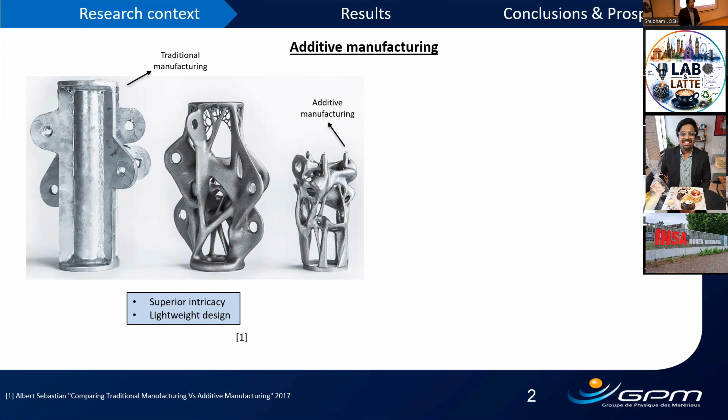Starting the defense, from an engineering perspective, additive manufacturing allows the creation of designs that are theoretically impossible with traditional manufacturing. This gives companies a competitive advantage so they can create products that are better, more efficient, but also appealing and unique to their customers.

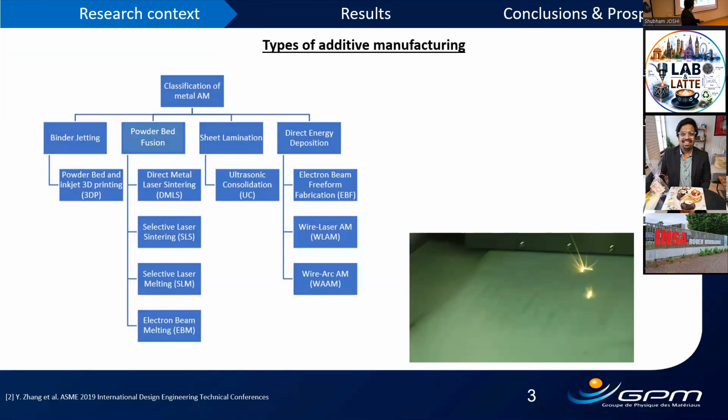There are several processes under the tree of additive manufacturing, depending on the material to be fabricated, type of feedstock, source of energy, and so on. But for metals, selective laser melting or laser powder bed fusion has been extensively used in research and industry owing to several advantages—I won't go into them since I only have 45 minutes.

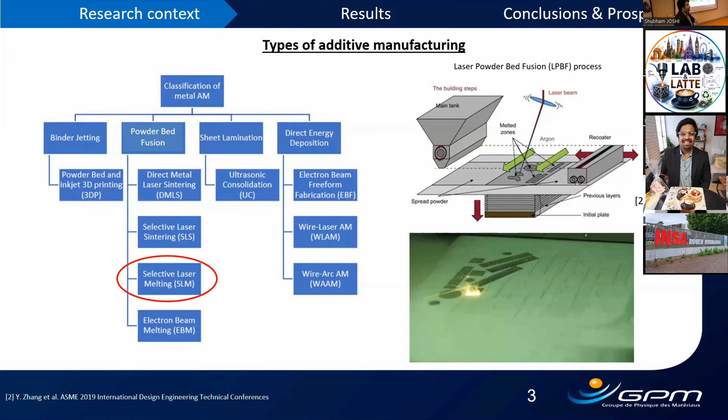In general, you can see the schematic diagram of laser powder bed fusion. A recoater spreads the powder on the bed, and as you might have seen in the video, the laser interacts with the powder, melting it depending on the CAD model, and the process is repeated until the final product is formed.

As the world moves away from traditional manufacturing towards additive manufacturing, several manufacturers and companies are deploying their footprint in this field, with many different applications in the past few decades. Looking at the market size prediction for the next 7 years, in 2030 the market size is predicted to be more than $11 billion. So it's a huge leap for any industry to make.

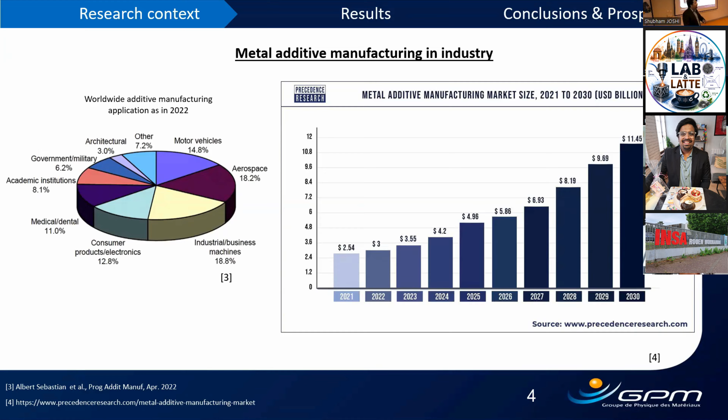Looking at current values, to make this leap comfortable, the most important thing industry needs to understand is how to achieve the mechanical properties desired by their customers. To get there, it's very important to talk about the mechanical properties that we have.

This review shows a yield strength versus elongation map for several alloy systems fabricated with additive or traditional manufacturing. As an example, if we look at this yellow domain, it is additive manufacturing steels, and what we see here is a varied range of mechanical properties that could be achieved for steels processed with additive manufacturing.

So certainly there needs to exist a relationship with processing parameters if you want to reach these mechanical properties. But fortunately or unfortunately, this link is not direct, and there is a huge pillar standing in between: microstructure.

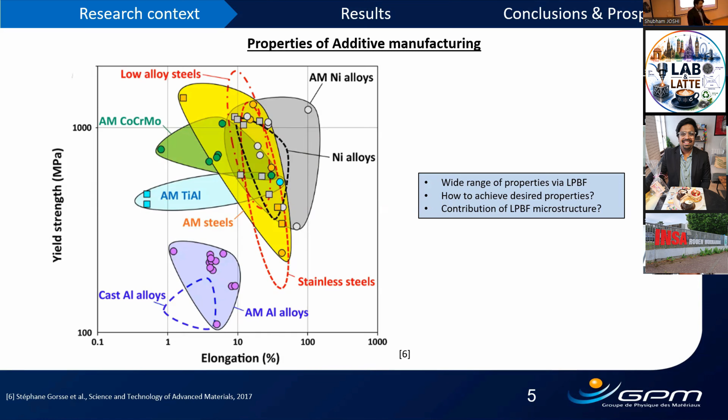Talking about the complexities of microstructure in additive manufacturing, this is one of my favorite images which I came across during the literature review, and I have used it extensively in my manuscript. If we consider LPBF 316L stainless steel as an example, we see that additive manufacturing generates a multi-length-scale microstructure in terms of crystallographic texture or morphological grain structures.

Then down the length scale, we have fusion boundaries and cellular structures due to rapid solidification, which is normally associated with the laser powder bed fusion process.

Down the scale, we see these dendritic cellular structures in detail with dislocations entrapped on the walls. And finally, at the lowest scale in nanometers, we see these second phase particles, precipitates, or oxides.

Having researched this for more than a couple of decades now, researchers are still trying to find the answer: which of these multi-length scale based microstructural features are responsible for mechanical properties? So talking about the highest length scale, which we discussed,

literature review of nickel 20 chromium fabricated with LPBF shows that crystallographic texture and grain morphology could be associated with process parameters. If we change process parameters, we see differences in texture, grain morphology, etc. And if we look at the engineering stress-strain curves of two differently processed alloys, we see there is a difference, so there could be an impact of texture.

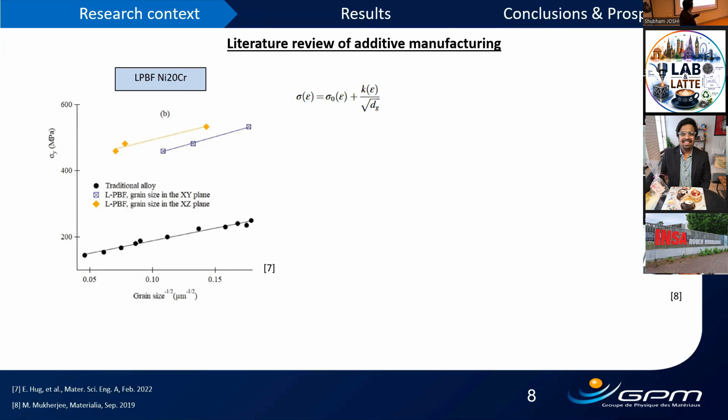But if we consider laser metal deposition of 316L, for the same kind of graph - yield stress versus inverse of square root of effective grain size - we see that the slope changes for differently fabricated samples of the same alloy. So that means there is an influence of grain size.

So can we generalize here that maybe it's associated to process parameters, or is it associated to process or material? Well, the question is still open.

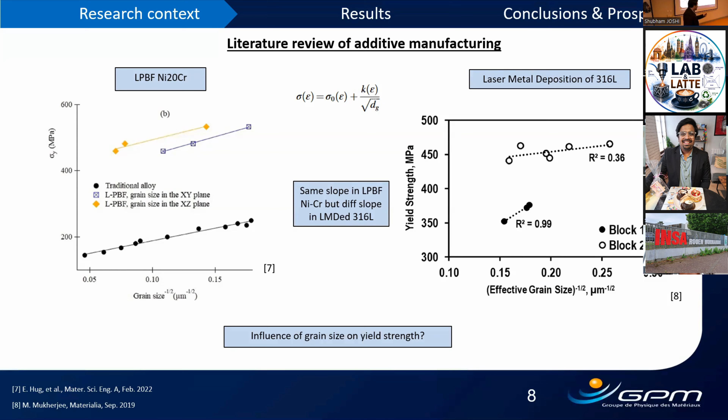We have so many more microstructural parameters we could talk about. Just to summarize, can we say it's an effect of texture, dislocations, precipitates, LPBF building direction, cellular structures, or grain size? Well, it's just the tip of the iceberg, and we have many more problems to come.

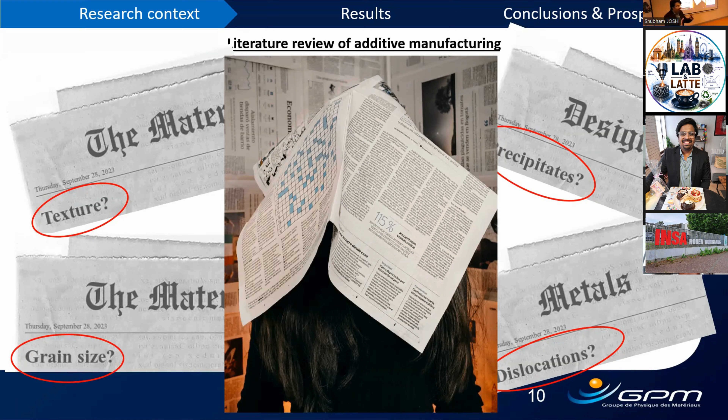So to try to avoid this complexity and difficulties, we decided to employ a simple nickel 20 chromium binary alloy, which has a simplified microstructure.

If you look at the phase diagram, with 20% weight chromium, it is theoretically a monophasic alloy. It forms a predecessor for nickel superalloys, having some applications in the high temperature industry. The advantage is that it's not as complex as a superalloy, because it is monophasic, so it's straightforward.

But another reason for choosing this kind of alloy is it has planar slip, so it has a strong propensity to avoid dislocation annihilation or cross slip.

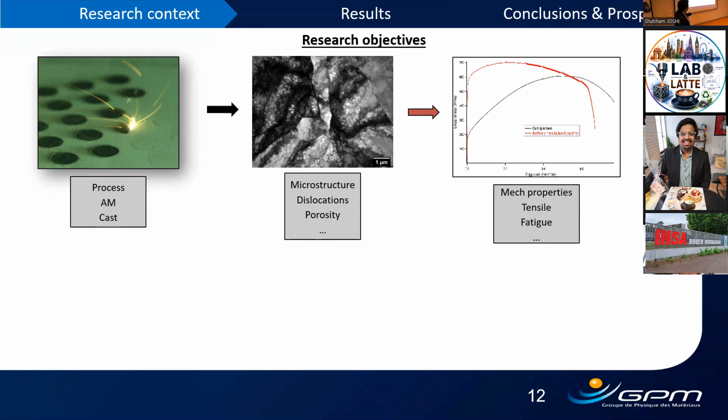Choosing this alloy, we focused our research objectives on the link between microstructure and mechanical properties, and we could formulate 4 important objectives.

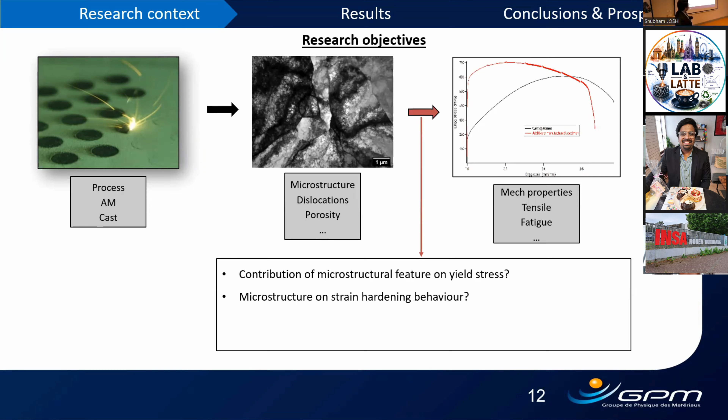The first was: what is the contribution of LPBF microstructure on yield stress? What is the contribution of the same microstructure on strain hardening behavior of LPBF nickel 20 chromium samples? Finally, the influence of LPBF microstructure on cyclic properties, and at the end, higher temperature tensile properties of the LPBF.

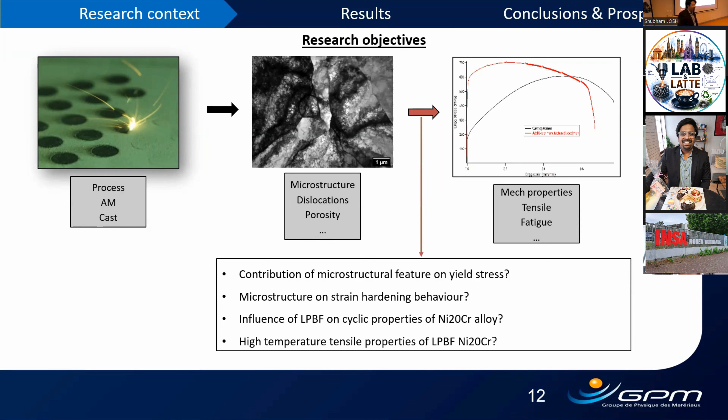But I only have 45 minutes. I wish I could talk about all the objectives, but here I'm just going to talk about the first 2.

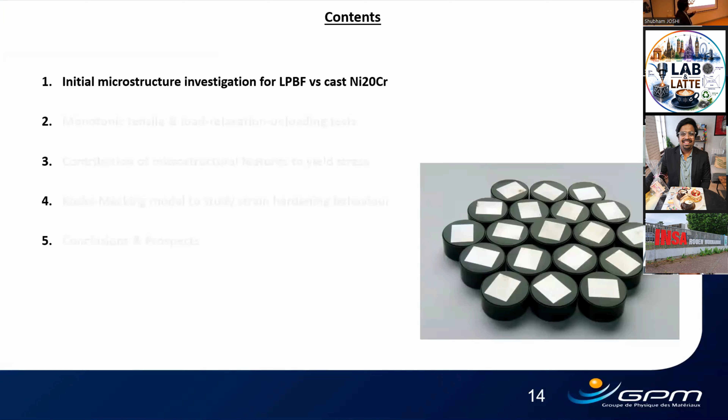These are the contents: we'll start with initial microstructure, mechanical testing, and the first 2 objectives, and finally conclusions. So we will discuss the first chapter: initial microstructural investigation.

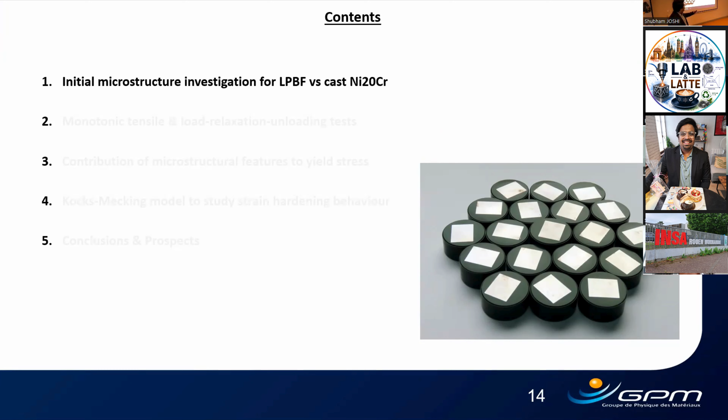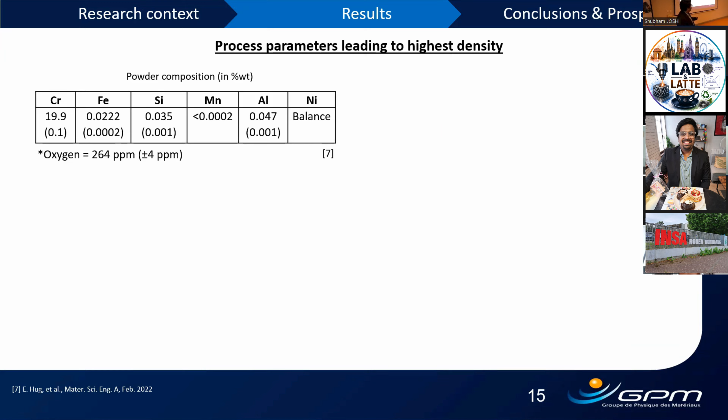The balance is nickel. The parameter optimization for fabrication of LPBF samples was done before the initiation of my PhD, so I was not responsible for it. It was done by Dr. Maxime Lelievre at CRISMAT, and these parameters led to highest density and least relative porosity.

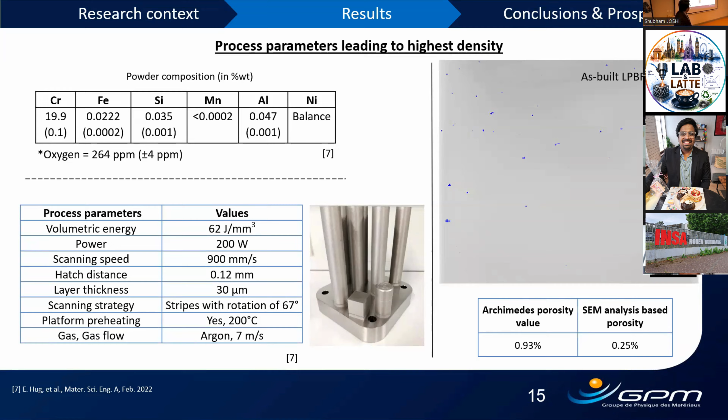Looking at the initial microstructure of LPBF nickel 20 chromium, this imaging has been done in SEM ECCI, with the building direction upwards, and we see a typically formed fine and heterogeneous grain structure.

If we look at the grain orientation map, we see the melting pools in this orientation, with the building direction going upwards, and the maximum intensity to be 2.6, which means this parameter set does not induce a lot of crystallographic texture, but we can clearly see some morphological texture.

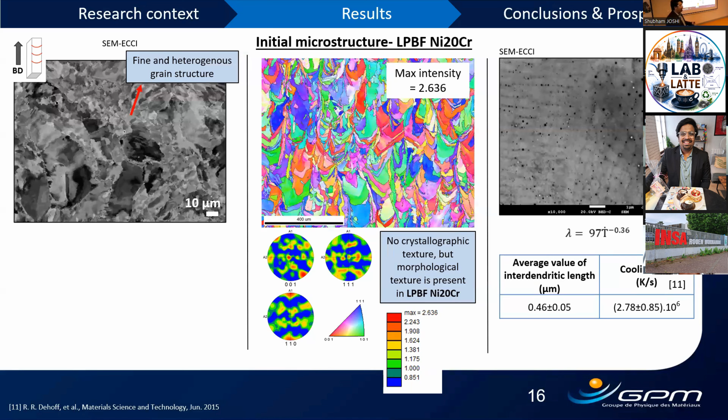Talking about another aspect of microstructure, when we magnify, we see different colonies of dendrites or dendritic cellular structures—several names are used in the presentation, but they refer to the same thing. These two colonies can be seen with average cell size computed at 0.46 microns.

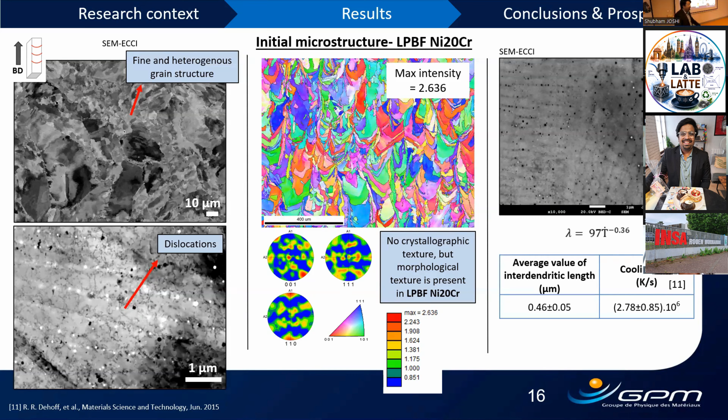Talking more about the dendrites or dendritic cellular structures, we can see these structures with some oxides on the walls, and also some dislocations going through the walls and crossing these dendritic structures. Because we're really interested in the dislocations formed in the as-built structure, we decided to investigate in detail via bright field STEM.

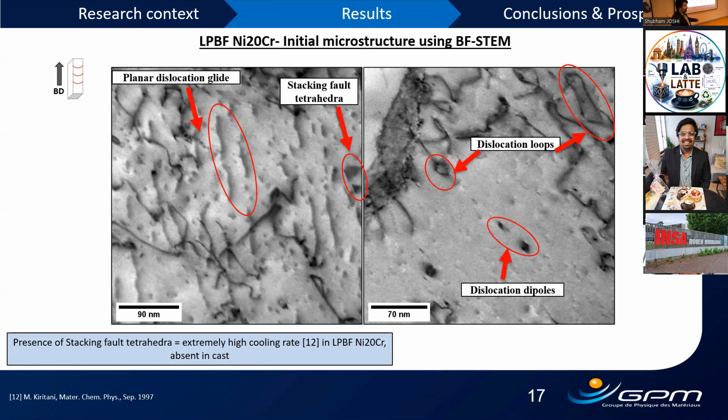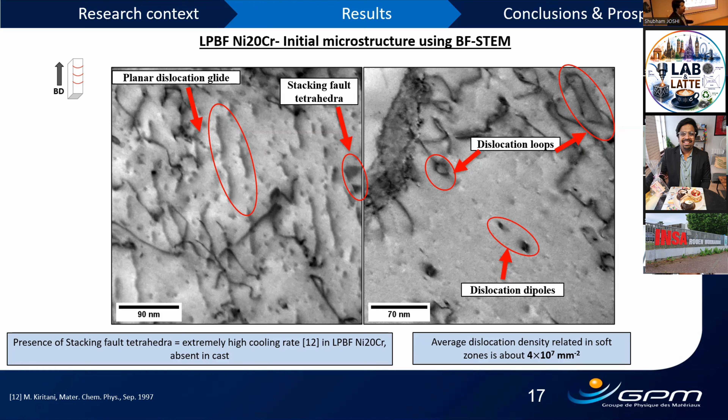Again, the building direction can be seen upwards. This led us to discover stacking fault tetrahedra, dislocation loops, dislocation dipoles, and planar dislocation glide as dislocation subfeatures. This is just an example of an extensive analysis we did, but using many images, we computed the average dislocation density in soft zones to be 4 x 10^7 per millimeter square, which will be used in the modeling in the following slides.

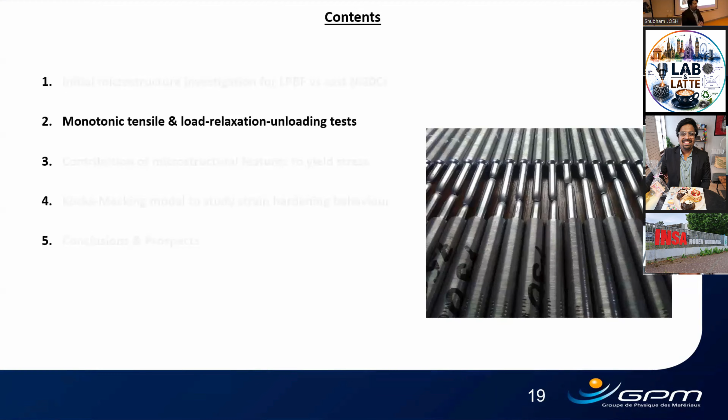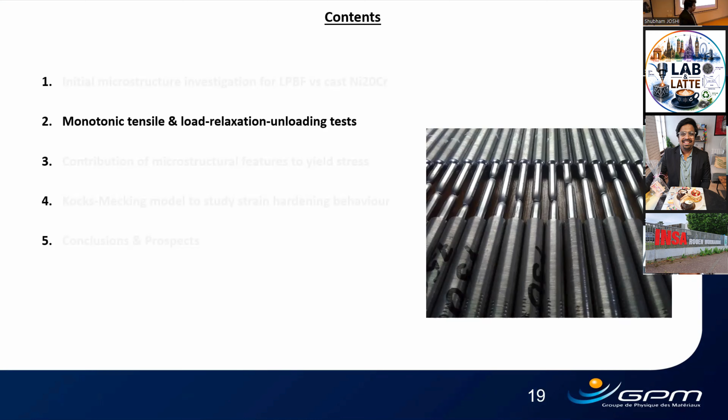Right now, only two important messages to keep in mind: if you look at the yield stress of the LPBF sample, it's more than double that of cast, and the strain hardening behavior of LPBF somewhat looks like parabolic hardening. But when we compare it with cast, we have a long linear hardening.

We understand clearly that there is a huge influence of microstructure on mechanical properties, but somehow we still don't know how and which features are connected. So the next logical step has to be go to TEM and check for changes. But here we decided to take a detour by doing a loading, relaxation, unloading test.

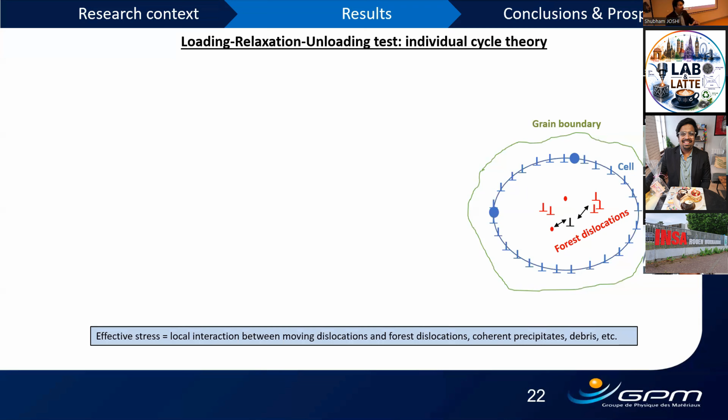Let's imagine, and this is again a very basic diagram, that there is a lonely mobile dislocation sitting in black in the middle of this matrix. Now if it has external load, it will certainly move. It will have interactions with different microstructural features. So if it interacts with short-range interactions like forest dislocations or coherent precipitates, this interaction is classified to be effective stress. We can understand what part of flow stress is coming from which microstructural interaction.

Another aspect of this flow stress partition is back stress. Again, this lonely mobile dislocation, if it has long range interactions with grain boundaries, heterogeneous dislocation structures, dendritic structures, or incoherent precipitates, this interaction can be constituted as back stress. So here we can understand and go in deep into the origin of flow stress partitions, and mechanically, using the same unloading sequence, we can use the position of the elastic domain to quantify the back stress.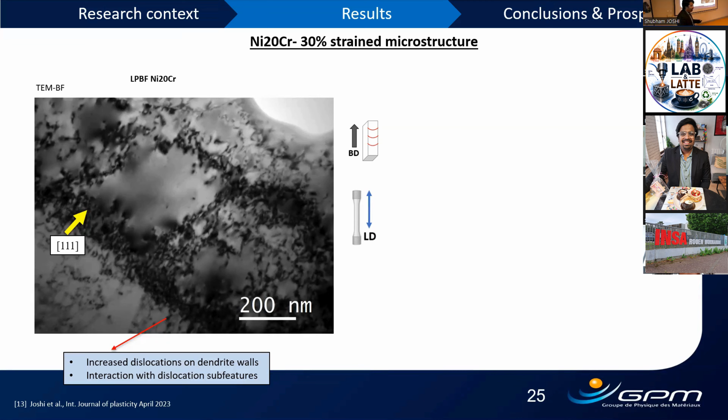What we see here is somewhat stability of the dislocation cell structures or the dendritic structures, whatever you want to call them. Qualitatively, it looks like the walls have thickened, meaning the dislocations have interacted. When comparing with the cast microstructure, we see a completely different picture, a completely different story.

We see stacking faults interacting with some dislocations, and also nano twins or twins in other micrographs - this is not very clear here. In extensive microscopy that we did on nickel 20, the LPBF samples, we do not see any twins in LPBF.

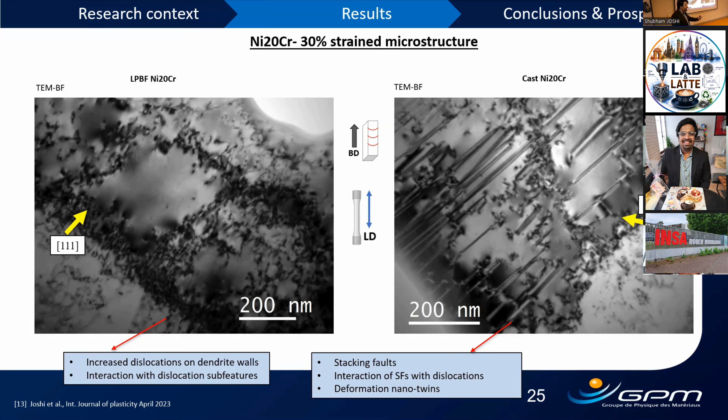So there is clearly even post-deformation microstructure difference as well. Coming back to the question, we can understand that there is a difference in initial microstructure, a difference in mechanical properties, and a clear difference in post-deformation microstructure. We could also narrow it down that somehow backstress, dendrites, and grain boundaries are responsible. But again, the question we asked is how much, and which exact parameter is missing.

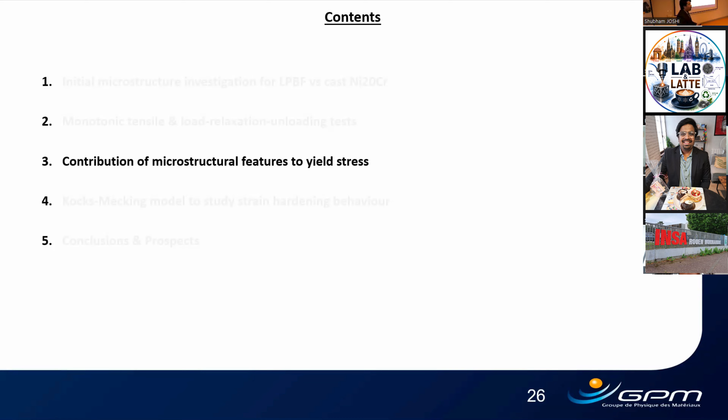To try to answer the first question about the contribution of microstructural yield stress, we considered a very basic analytical model. The yield stress can be separated into effective stress and back stress, both at yielding. And the back stress is further divided into intergranular and intragranular components.

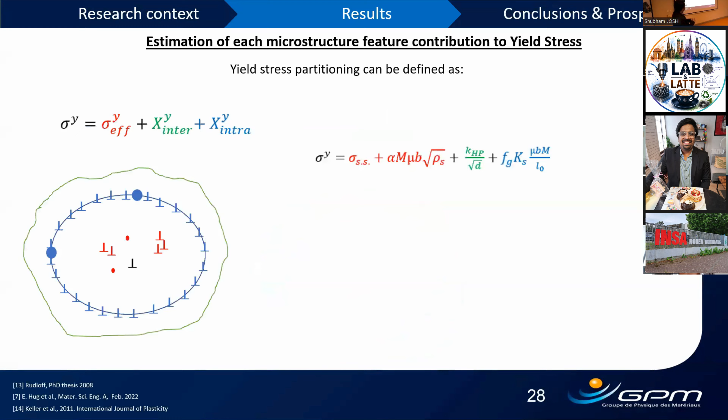In this model, the effective stress is connected to solid solution and dislocation density in soft zones. The intergranular back stress portion is connected to grain size strengthening, which is the Hall-Petch equation connection. Finally, the intragranular back stress is connected to the initial dislocation cell size, the dendritic cell size calculated in the initial microstructural stage.

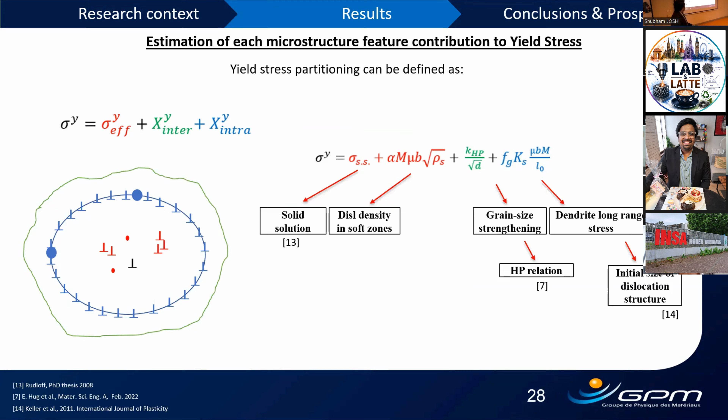The highlight I want to give here is that despite having several parameters, which can be seen in this equation, the work of my PhD was to show that extracting these parameters from experiments or literature is not hard, and we can actually do it via simple experiments.

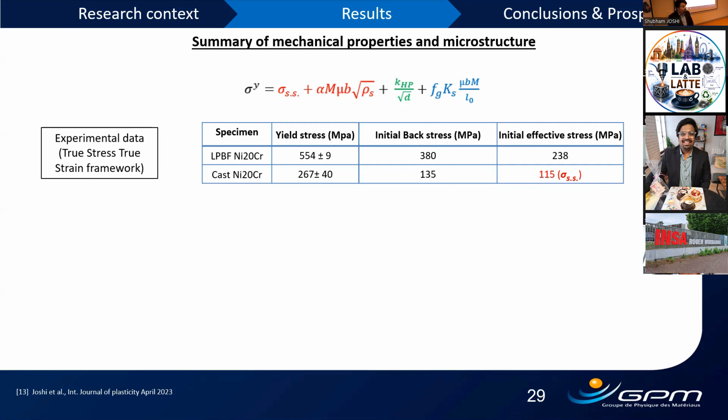For example, yield stress required in modeling can be easily extracted from mechanical loading. Initial back stress and initial effective stress can be computed from the loading, relaxation, unloading test. This initial effective stress for cast has been used as solid solution, because we believe at effective stress there is no initial dislocation density, or its influence is quite low, so only a solid solution should logically entail.

Average cell size can be calculated from microstructural characterization, same with initial average dislocation density in soft zones. Average grain size and Taylor factor can also be extracted from EBSD analysis quite easily. And finally, parameters like the Hall-Petch constant, alpha which is the dislocation arrangement parameter, shear modulus, and Burgers vector can also be extracted from literature.

Two parameters I did not mention are Fg, the fraction of grains which have hard zones—we believe these dendritic structures are present in all the grains, so it has been considered to be 1—and Ks, a constant which depends on stacking fault energy, also extracted from literature.

0% error, but unfortunately life doesn't go like that, so we move on. If we look at grain size strengthening, it is 111, and the dendrite long range back stress is 258. The sum is 369, which is quite similar to the experimental value, so we do not have a lot of error. The total yield stress predicted from this model again matches with the experimental value, so this shows the model makes sense.

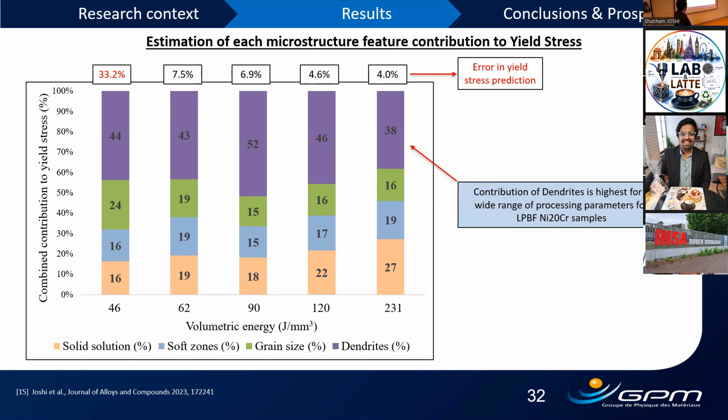Unfortunately, for 46 joules per millimeter cube, the prediction was way off—we were 33% higher. But for other samples, the error percentage is, I guess, quite acceptable. So again, just to conclude, for all the LPBF samples we can consider that dendrites are the most influential parameter.

So basically with that, we answered the first question. For yield stress, dendrites are the solution. You know, dendrites are your guy for yield stress.

But when it comes to the second question, what happens to strain hardening? Are these features, dendrites, still responsible for strain hardening? And could we model it? Spoiler alert: dendrites are still the most responsible factor, but let us look at how.

We used Kocks-Mecking modeling, depending upon Taylor's equation and the Essmann and Mughrabi model. This Essmann and Mughrabi model is nothing but a modification of Orowan's equation, and it depends on change in dislocation density with respect to plastic strain. In other words, this is the dislocation production mechanism—how dislocations are produced as we go into strain.

This equation shows that for dislocation production, we could use different microstructural features responsible for it, starting with forest dislocation interaction, strain hardening due to grain boundary, geometrically necessary dislocations, size of the initial dislocation structures, dislocation annihilation, and mechanical twinning. But as I also discussed earlier, post-deformation microstructure in LPBF does not have twinning, so for this modeling we have discarded that component.

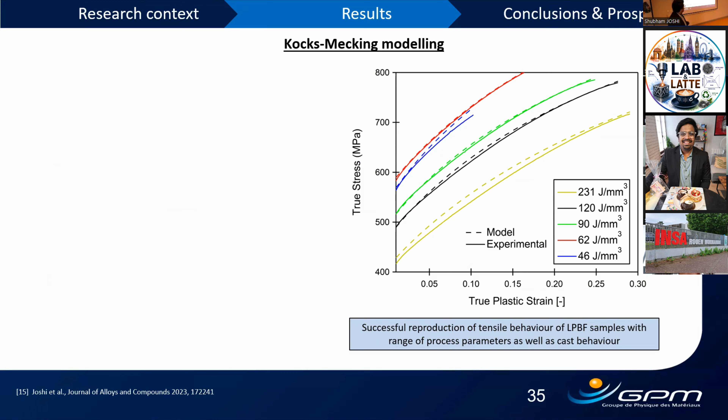So solving these two non-linear differential equations, we could successfully reproduce the tensile curves—true stress versus true plastic strain—for all the volumetric energy densities using the model. One thing I should also mention: in this model, all the blue parameters have been taken directly from experimental literature, but only two parameters, beta and L0, have been optimized by the model.

So L0 we already have—this is the average cell size—but we decided to model it so we can check if our model works, to see if we get modeled values somewhat similar to our experiment.

So solving this, we can reproduce the tensile curves, and also we could see the modeled values for L0. We see that the model a bit overshoots compared to experiments. The ratio is from 3.3 to 5.8 for different volumetric energy density. But in general, we can see that it acquires similar order of magnitude.

Using this analysis, what we proposed here, and this work has been recently published, is a correction factor depending upon the overshoot that this model gives. Using that correction factor, which was 0.22, you can directly use L0 from experiments, so you do not even need to model-optimize this value. Just beta needs to be optimized and the model works.

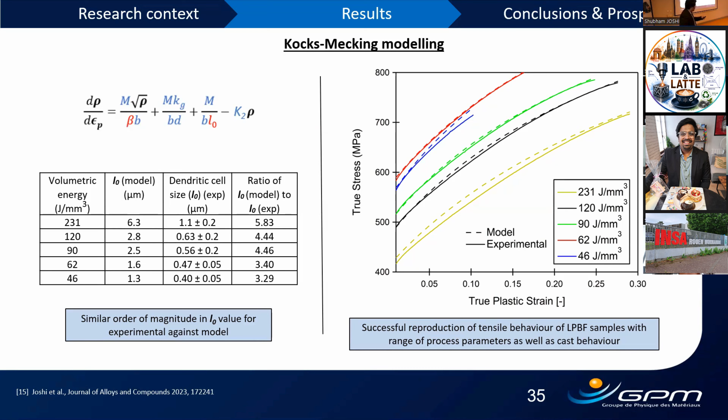But I started this discussion by saying how dendrites or microstructural features are associated with strain hardening. I don't know about you guys, but I think I have still not told anything, so let's get to that. When I talked about dislocation production mechanisms and how they are associated with microstructural features, the model actually helps us understand this dislocation production rate with respect to individual microstructural features.

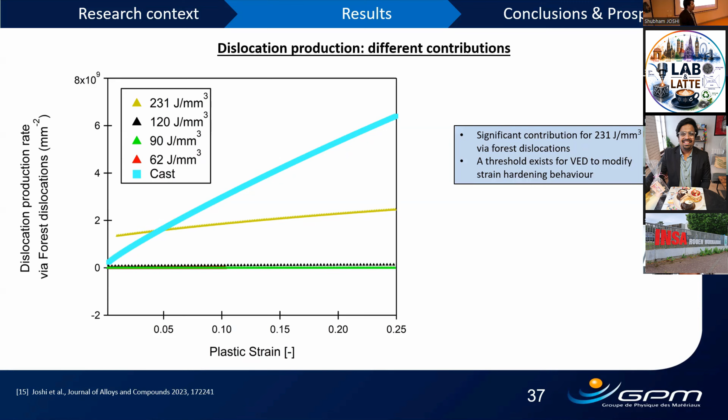So what this analysis tells us is that with process parameters, and this modeling, it is possible to tailor the strain hardening behavior according to the desired mechanical properties that are expected. And if we look at these LPBF samples, we can clearly conclude that dendrites are the most influential ones, not just for yield stress, but also for strain hardening, as given here.

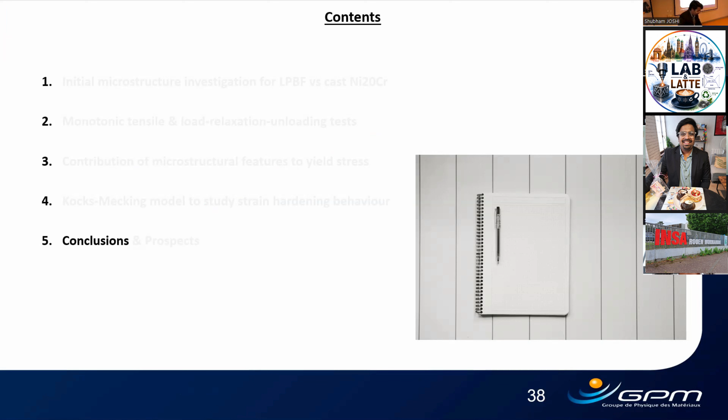Waited for 3 years and already the conclusions are here. Seems weird. So talking about the conclusions, we will start with the same lovely image, and this shows how actually I liked it, not just saying it.

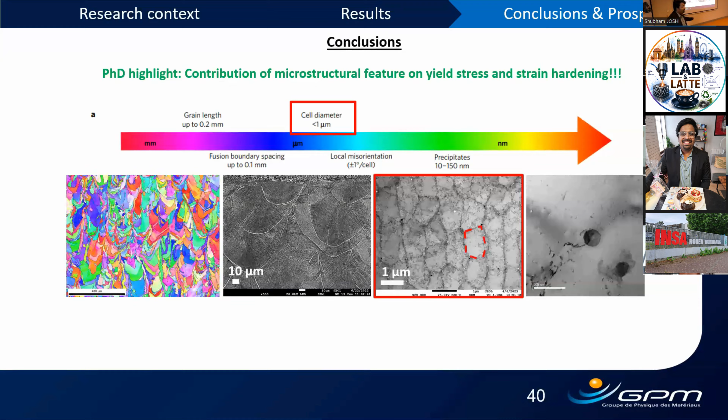The PhD objective that we set for ourselves, and at least what we are discussing here, is to quantify the contribution of features on yield stress and strain hardening. In this PhD, we could successfully do a multi-length scale analysis for nickel 20 chromium, and we could also understand that cell diameter less than 1 micron, or these dendritic cellular structures or dendrites, is clearly the most influential parameter to answer both questions that we asked.

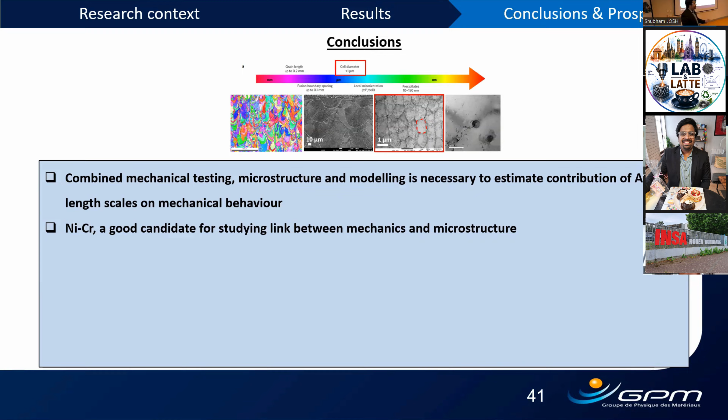So just as a bird's eye view to conclude in bullet points: combined mechanical testing, microstructural characterization, and modeling is necessary to estimate, at least for nickel 20 chromium, the contribution of AM length scales on mechanical behavior. Nickel 20 chromium, or in general nickel chromium, seems to be a good candidate to study this link, as it can easily avoid complexities and dislocation annihilation. Clearly, we could conclude that dendritic cellular structures, after the contribution of AM microstructure, are responsible for the majority of yield stress and control strain hardening.

It is possible to tailor microstructure according to the desired properties, depending upon process parameters, whether you want forest dislocation interaction or dendrite dislocation production and so on. Finally, the correction factor we propose, along with the modeling, paves the way to include this Kocks-Mecking-type modeling in crystalline plasticity modeling of LPBF to understand the plasticity behavior in much more detail. And now the prospects.

I have no idea how long I have spoken, but the prospects are going to be slightly longer, and I'll tell you why. I could not control myself from talking about cyclic properties. This was supposed to be left out, but I couldn't help it. I'll tell you why I decided to include this in prospects, but I will not go into too much detail.

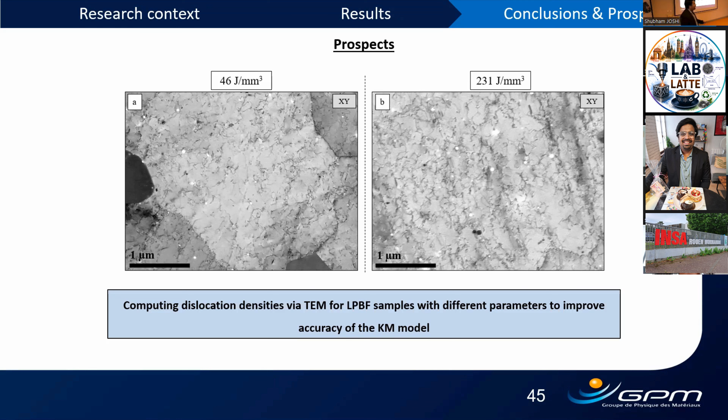Another prospect: when comparing different volumetric energy densities and looking at the contribution of microstructure on yield stress, we made a strong assumption that dislocation density in soft zones should be equal across all samples, at least of similar order of magnitude, based on literature, but it's certainly not exactly the same. As a prospect, I suggest future researchers compute dislocation densities extensively by TEM to increase the accuracy of the model.

Finally, we did some high temperature tests. I added this to prospects because nickel-20-chromium has a propensity towards forming short range order close to 550 degrees Celsius. The LPBF microstructure is already complex, and with short range order it could become even more complex, so understanding this is still necessary for successful application of nickel-20-chromium.

If we look at the engineering stress-strain curve at the test temperature of 500 degrees Celsius, we clearly see dynamic strain aging.

So clearly, somehow, the Portevin-Le Chatelier effect should be the cause for investigation.

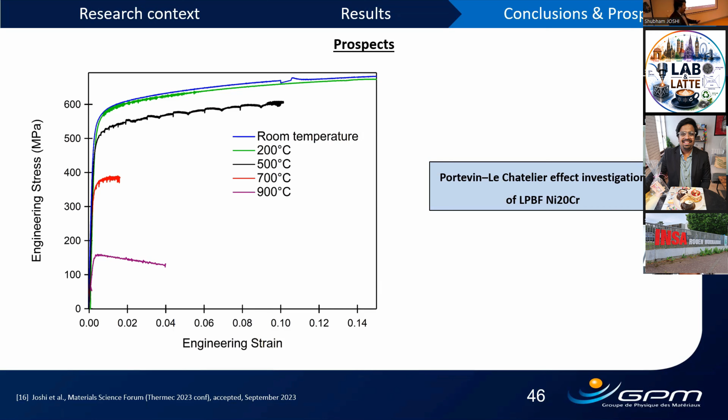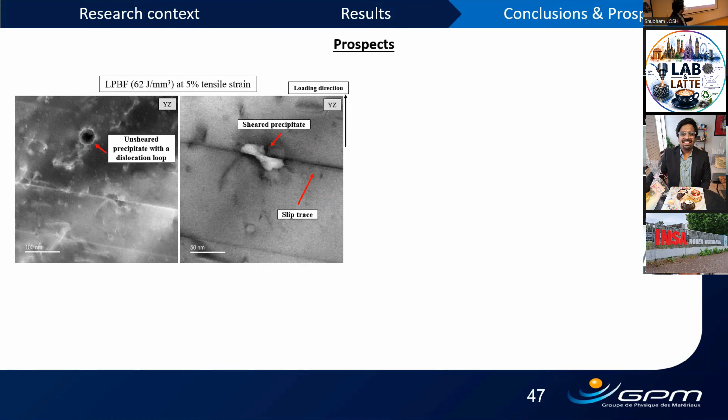This is not very common, but we saw in one of the micrographs that it interacts with the slip trace. And the EDS analysis of these oxides shows that there forms a chemical segregation in terms of core and shell. So somehow these oxides could also be influential on mechanical properties.

So it would be really interesting to take up as a challenge. So I end my talk here, and thank you so much for listening to me, and I would love to answer the questions.

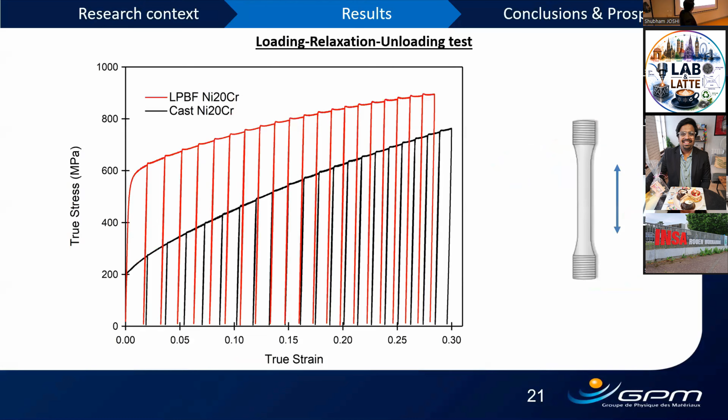Yeah, I've seen that. Okay.

I'm asking because when you fit the parameters in your modeling, there's one table in the manuscript where you give different beta values, and they are very different. If the curves are exactly the same, I don't understand why there are such differences in the fitted parameters. Do you have an explanation for that?

The explanation we extracted is that whenever the beta parameter is huge, like 10 to the power 12, or minus 5 point something into 10 to 9 or 12, it means that this feature is not responsible. If you see the formula, it's almost infinity, so the influence is zero. The model fits beta parameters depending on how the two differential equations can be fit, so as soon as a feature's contribution becomes zero, it gets random values.

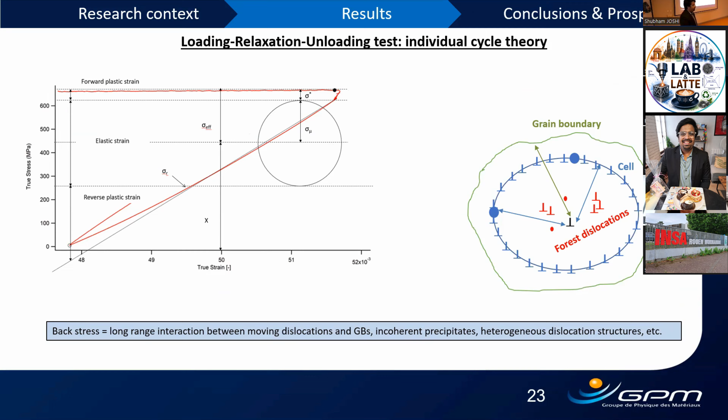Sometimes you have 8 orders of magnitude between the minimum and maximum value, which is quite huge. So when it's 10 to the 9, you consider that it's already infinity.

So basically, if you want more simplified modeling, you can squeeze out this term from the model for the LPBF material. That's your conclusion - you can even have a more simplified law. I'd just like to show this slide.

Here you are varying the conditions also. With different conditions, for 46 to 120, where beta is zero, we saw that the contribution is to the power 9 - all the values are random. But as soon as we saw the forest dislocation interaction working for 231, we see a finite value, meaning the model made sense there. And for cast also, where we see higher contribution of beta, the value makes sense. This is how the interpretation is made.

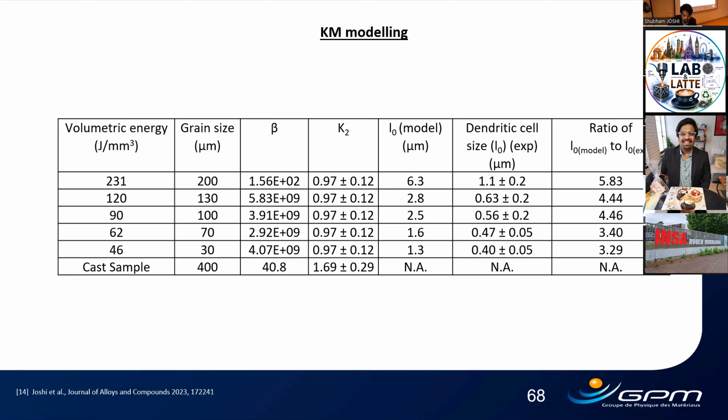Now I have questions on the methodology, because you didn't explain much about the statistical data for the microstructure description. Can you explain how you perform your grain size measurements and dislocation cell measurements, on which surface, and how exactly?

For dendritic cellular structures or cells, for the 62 joules per millimeter cube sample, we selected 8 different locations. At the same magnification, we consider normally one single colony, avoiding the colony boundary, trying to get one colony. Then using ImageJ, we analyze the average size, and depending on the average size given by the ImageJ analysis for 8 different locations, we took the statistics.

So you do this within the electron channeling contrast imaging? Yes, the imaging has been done by ECCI.

For the grain size, we considered EBSD analysis. I'll just show here - for the grain size analysis we use EBSD analysis and look at the maximum area fraction, choosing an average grain size from that.

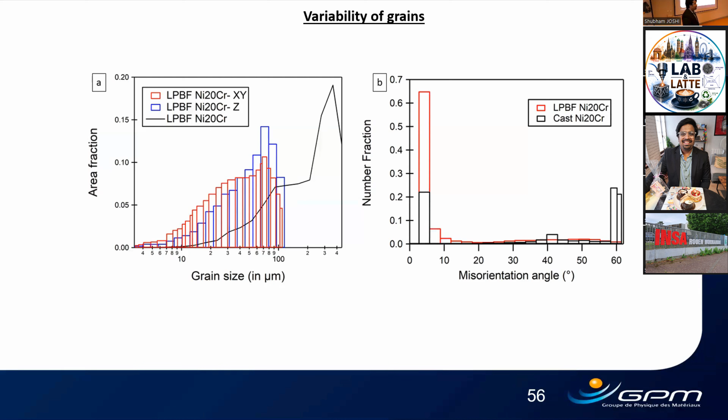Yes, so you show that there is a high contribution of the solidification cells, right? So this is quite convincing. You're talking about the size of the dendrites. I was wondering if there could also be, maybe at second order, an effect of the thickness of the walls. There's a lot of things in your walls, the dislocations.

You have the precipitates, so you talked a little bit about them in the prospects. Do you have also maybe some heterogeneities in the chemistry between the walls and the inside of the dendrites, or is it homogeneous? This was also a question.

So literature shows us that there should be chromium segregation. Then we have seen oxides which are chromium rich, so there seems to be some heterogeneity. But when we tried to do atom probe analysis with Williams, we saw a plain monophase structure. But again, we were not sure if we had the dendrite boundary in between, because it was quite complicated to take the chunk out. We also used FIB analysis to try sample preparation from a different point of view to see if there is a chemical heterogeneity, but the sample also did not show it. This could also be because the contrast is difficult for chromium and nickel to be shown differently.

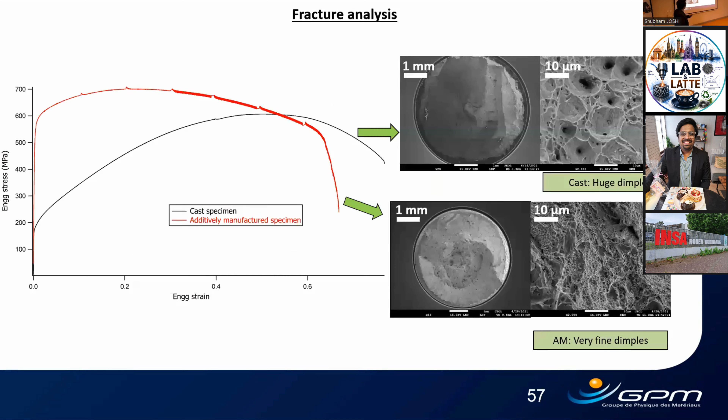About the first question, yes, we analyzed dendrite wall size for 7 different locations, as I mentioned - sorry, for 7. So yes, we have variability in terms of cell size and wall size. First we were going for this wall size modeling, and there is a modeling based on, let's say, GNDs, or focused on hard zones. So we were thinking to go for the dendrite wall size, because we can compare the fraction of this dendrite wall size and try to analyze it with the hard zones. But finally, we decided to go with the soft zone dislocation analysis, and that's the reason we could eliminate the dendrite wall size. But certainly, it is an influential parameter.

Okay, but certainly, because I feel if the walls are thicker, that means the dislocations might need more stress to go away. Yeah, so certainly physically there should be more there. Yeah, but it's a prospect again.

And regarding the precipitates, maybe this would be my last question - so you've shown those precipitates. I was wondering more for the fatigue part, because you use two different batches of powders, as received and recycled, and you see slight differences in terms of lifetime for your specimens. You analyzed them with the view of the porosity, but I was wondering, could there be any effect of the precipitates on the lifetime? Do you see any differences in terms of precipitate density, size? Did you look at that?

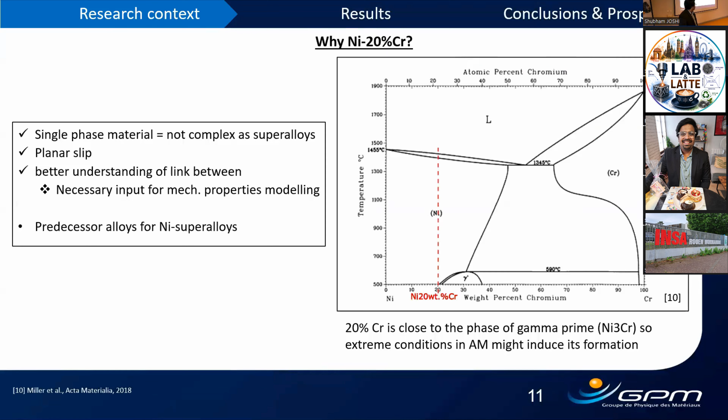How do you quantify that? Probably quantification is just the aspect ratios of grains, could be on different planes. So how did you try to... I mean, how did you quantify that really? It's quite difficult - no, it came from literature review, so this is not my own work.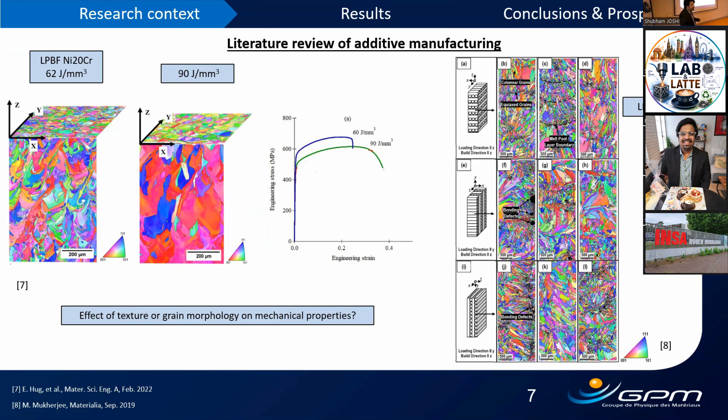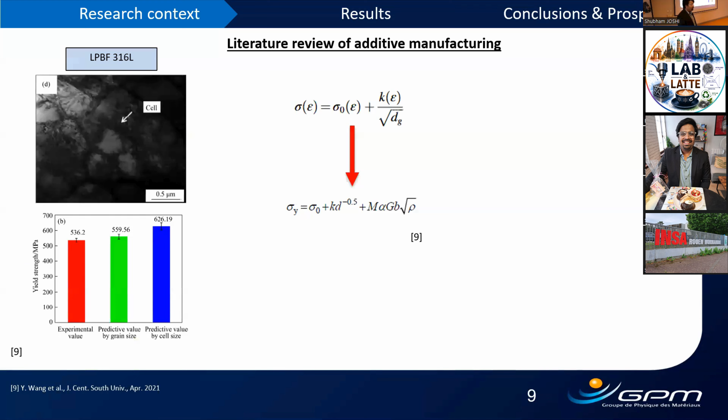But in your work, at some stage in your analysis, where you have all your microstructures, you said that you had this morphological aspect - the morphology of your grain, which is more or less complex, depending on the build as well. It's changing, you have the slide... when you go from one side to the other, you are changing this morphological aspect of your grains and the 3D aspect of the grain. So did you try to analyze that? Did you focus on that a bit?

And when we think about grain size, I think that was a bit the question of Steve - can we really put a grain size on this type of microstructure? On the right hand side, the left hand side is a bit complicated, certainly. But again, there is an interesting point - I did not use that in my analysis, but in literature review, they talk about effective grain size also, just to compare or to talk about probably mean free path for dislocations. But here we have dendritic cells, which are also a more governing factor for the mean free path. So I think that effective grain size might not be very useful for directly this analysis.

We did not quantify the morphological aspect. It was a qualitative analysis to see that clearly the morphology seems to be changing. But using the average of the two, yes, this is a very crude assumption that we can take the average of grain size in different orientations, in XY plane and XZ plane. So certainly there could be a factor or sensitivity in terms of a correction factor of aspect ratio, which could improve the model. But as of now, I cannot point you towards the quantification of this factor.

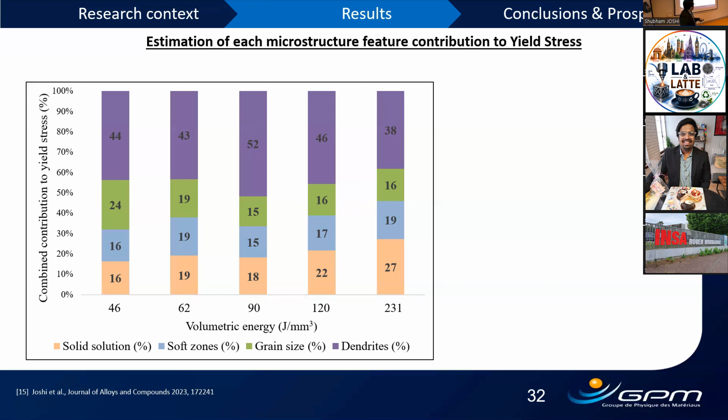Moving on for different locations or different parameters, if we directly look at the formula, I feel dislocation density in soft zones could be a parameter which can be sensitive or which will change the model a bit, or the sensitivity on this parameter. But we tried using different dislocation densities, so double or half the dislocation density that we have, and the effect is only for I think 35 to 40 megapascal.

So the error is not too much, and certainly we will have an influence of parameters like grain size and dendrite size here. Apart from that, I don't see the model predicting too wrong if the fabrication is done properly, because for 46 joules per millimeter cube we did not have good density, and we had a lot of porosities, and the fabrication was not optimized. So that certainly had some issues, a 33% error. But when the fabrication seems to be okay, the model seems to be okay.

Okay, but it's not about whether it's good or not on the model, like fitting well the data. In a way, we are fitting some fitting parameters at some point. It's just to make sure that, in interpreting this, to my opinion, the key interesting thing is to understand better the physics. So it's more saying, okay, if I'm wrong on the parameters, is the physics still right or not? And that would have been a good thing to have.

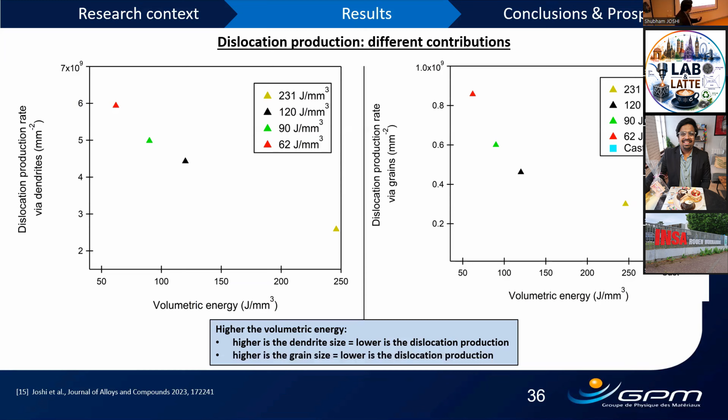I can't absolutely answer this, but I feel it will have some influence on the orientation of these dendritic colonies. I have an image from literature, a recently published paper in Materials, a very interesting one. It shows that sometimes dislocations come off the plane, or appear elongated when they're not really elongated—the distance between two walls is similar, and it's just that the colony is rotated. So I don't think we have to consider different average cell sizes; we can directly take the minimum difference, which should help this understanding.

Now, will orientation change things? Yes, it will. Many papers show that at the border of these colonies, or sometimes on the walls, oxides or pores can induce nucleation for cracks and propagate as inter-dendritic fracture. So when it's not about yield stress but about fracture mechanics, I think the orientation of these colonies will certainly have a huge influence.

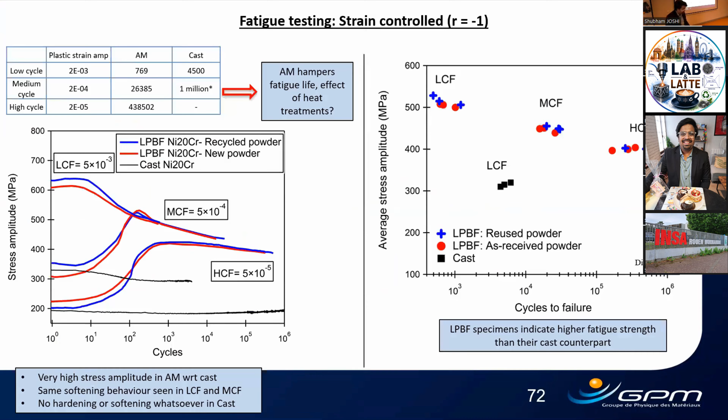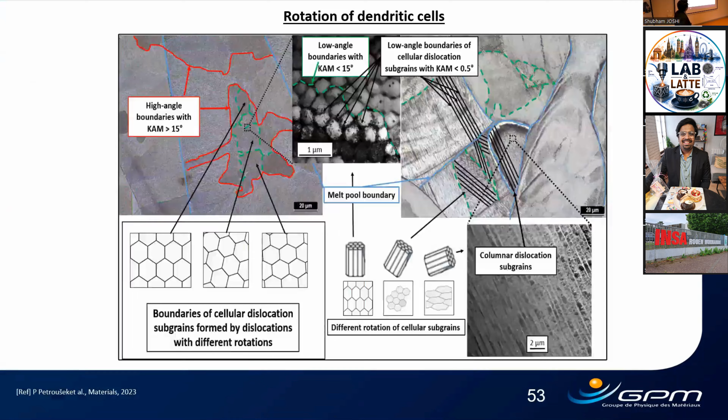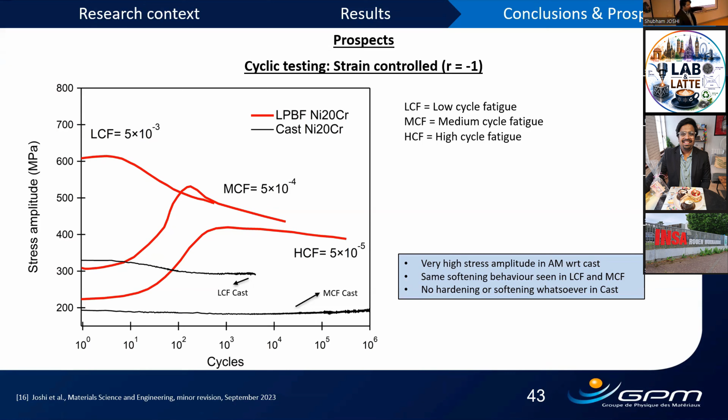What we did, and it's also in the manuscript, is we were really interested in what happens to the dislocations when it is still in the softening zone. So we stopped the MCF test at 10,000 cycles, and then 1,000 cycles. So it was an interrupted fatigue test. We took this part in TEM, and then we saw some slip systems which are active, and there is a dislocation pileup between two walls. So it seems like the dislocations are somehow going from one part to another, and this supports our hypothesis about the post-fatigue microstructure.

It looks like they are moving in this direction. They are disappearing at one point and getting differentially stacked up at another point, and this is changing the overall cell size. So it looks like the cell size is increasing, and hence this increase in cell size, or movement of dislocations, or modification in cell structures, a combination of these, is inducing softening. This is what we hypothesize.

Okay, so I have one more question, but I don't have time. Just a very short answer, very short question, short answer. Finish on that one. I think you had a discussion at the end on the threshold for dislocation mobility, some stress level. You were asking a question. What is a good threshold for dislocation mobility? In fatigue, you mean?

Yeah, in fatigue. At some stage, towards the end of the manuscript, you speak about 85%. What is the stress level at which I start to have mobility, if I did read the work correctly? Do you think there really is a threshold for that? Which is in that type of range?

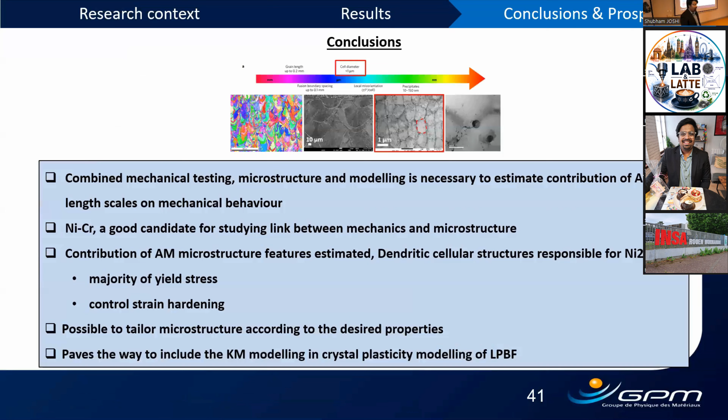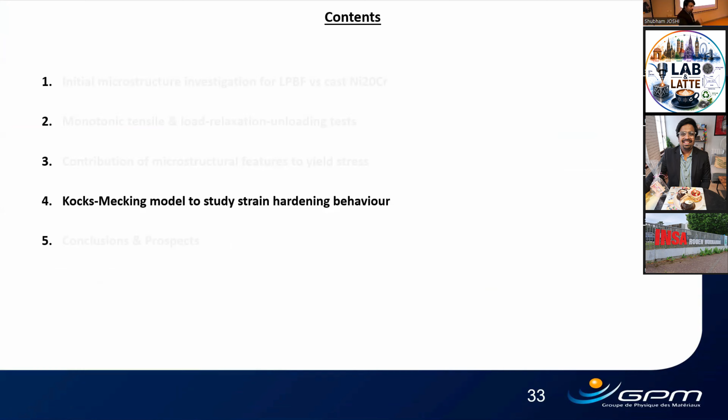Okay, so my question is concerning the Kocks-Mecking model. If I understand your identification, all the identification of the model is from macroscopic loading tests. So you introduce microscopic parameters into your model, like grain size and cellular dendritic size, but the identification of the parameters is from macroscopic loading tests. Yes or no?

I'm not clear, could you please clarify? The identification of the parameters of the model. It's just from the macroscopic loading. Yes, test, macroscopic, yes. So in your model you have microscopic parameters, but the identification is just from the macroscopic loading test.

Yes, it's interesting, okay, process. And you compare the result of your identification to the macroscopic tensile test. Yes, yes. So for me, it's evident to obtain the same result because you are using this test to identify and you validate your model with this same test.

So my question is, is it possible to validate the model with other observations? For example, in your report you have plotted the dislocation density evolution from the model. Can you compare this result obtained from the model to experimental data, for example, to further validate this model?

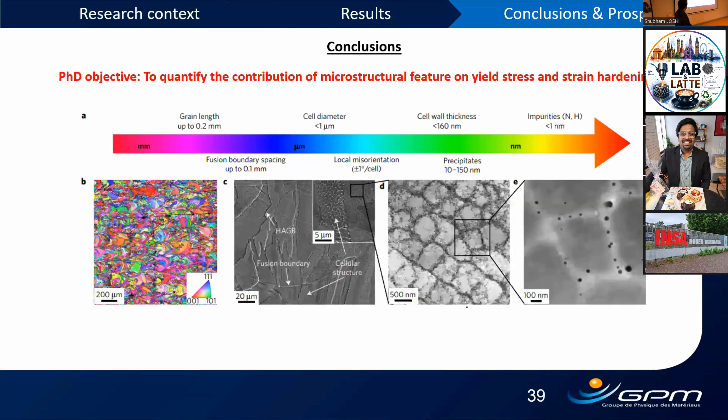Thank you. So now I'll give myself some time and I will be very careful with my time as well, considering that I must manage myself. If we can go to slide 47, we're not so far from that one. Good thing is you have already had many questions on the model, so I'm not going to ask you questions on the model, but I will focus on other things then.

You're having these oxide particles, and you don't say much about them. You notice they were there, but it looks to me, when I look at what's in your manuscript, that they're changing size when you're changing the VED. Is that correct? Yes, they will change sizes. Agreed, yes.

I was wondering if that could affect the mechanical properties. I wouldn't expect them to have so much effect, but I have more in mind elongation, for example. The reason I'm saying that is because it's quite well known that when the size of a particle increases, the chances of it leading to damage is higher. So I would expect it to have an effect on ductility maybe. Did you notice any of that? Can you comment on that?

So first of all, yes, we can see that the ductility changes, but we have not considered ductility in this PhD, only necking. It's changing in what direction? Is it influenced, you think, by these chromium particles, by their size increasing with VED? The thing is, the ductility in general increases with increasing VED, but the reason for that is because the cell size, the grain size, everything is increasing, and the strength is decreasing. Yes, right, the strength is decreasing as well.

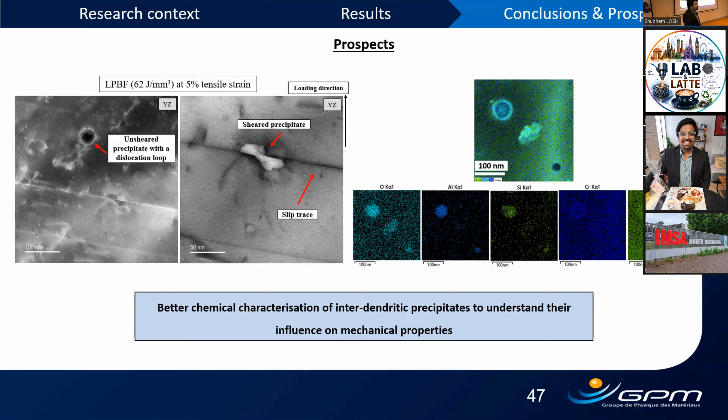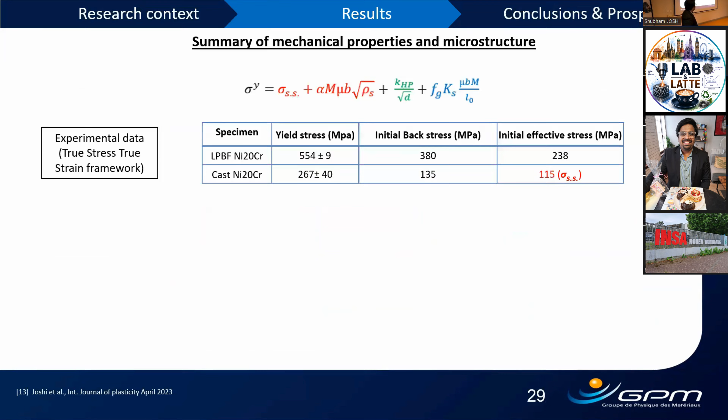I'm not talking about the strain at necking, I'm really talking about the fracture strain. But I saw in one of your slides that you did measure it. Did you measure it for all conditions? No, it's only for 62 joules per millimeter cubed. The whole PhD was supposed to be only on this one. And then, since we found this model works and it's giving us interesting results, the next question we asked in the final year of my PhD is what happens if we use different process parameters.

Well, interesting, thank you.